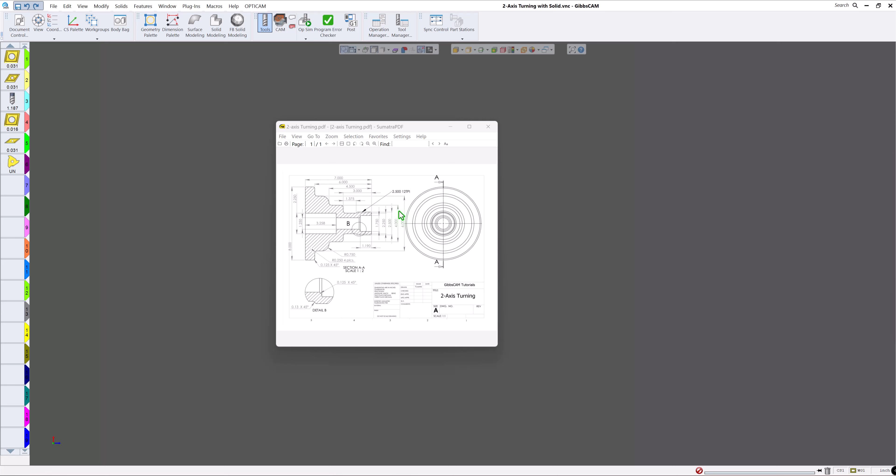If I bring up the model again, as you can see here, this is the same model. We'll put the print in the description as well as the tool list, but it's the same part we did in class number 4, just using a solid model instead.

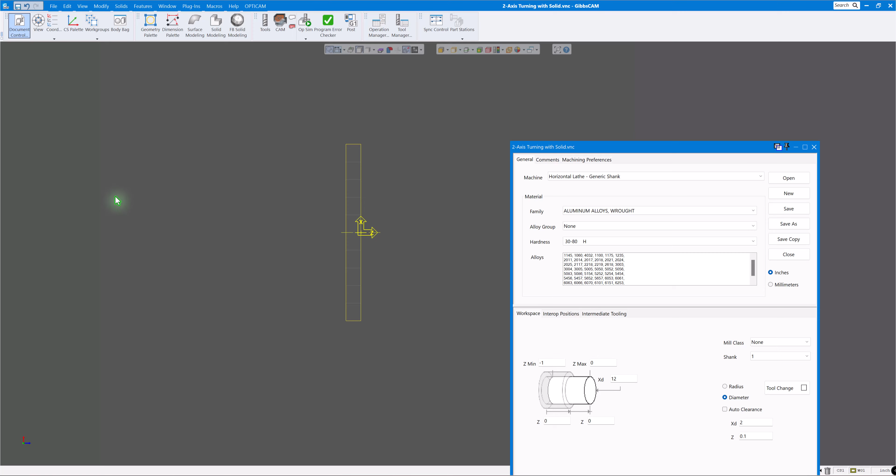Now, just like with all Gibbs parts, when you start a new part, especially if you're importing a solid model, you always want to start Gibbs by creating a new part to make sure you have the correct machine and everything before you import a solid model. So make sure you start new, give it a name, go to your document control, make sure you're on the correct machine that you want to program.

In this case, the horizontal lathe generic shank here. Don't worry about these dimensions here. Just make sure you're on the correct machine first and then import the solid model. Now, when you import the solid model, you can just go to File and Import, and you can find the files that you would like to import.

In this case, it's a SOLIDWORKS file, but you can see the drop-down menu. You can bring in pretty much any type of file you would like. Some of these aren't solid models like DXF, but a lot of the rest of these are. So STEP works really well. Parasolid is probably one of the best to bring in. Also, SOLIDWORKS files or assemblies will come in just fine. So in this case, the part we're going to do is this one right here, same one we did before. So I'm going to click on Open.

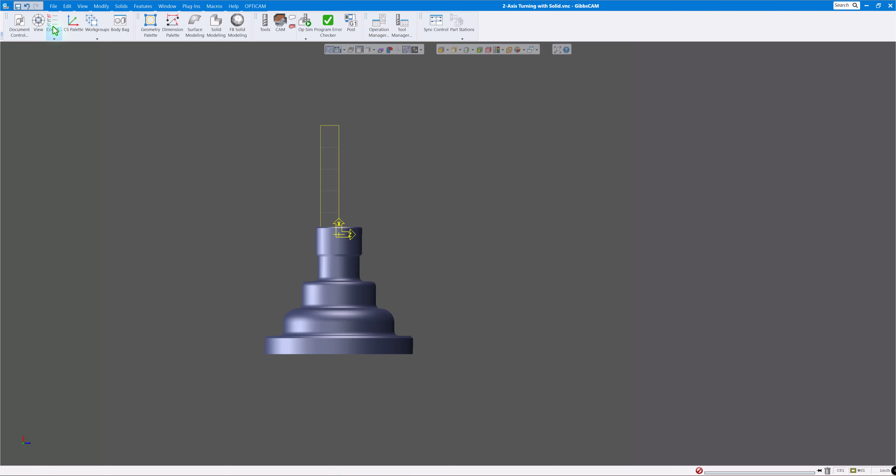And Gibbs is always going to bring in the part in the orientation that the engineer, whoever drew this, put it. So it won't necessarily be in the correct position that you want to start machining it. In this case, you can see it's 90 degrees off. This is my ZX plane. So we need to take this solid model and rotate it.

So the best way to do that is just to click on the part, your solid model, make sure face selection is off. Even if face selection was on, it would still grab the whole part because it's a solid. So we'll just grab the whole part, go to Modify 2D Rotate, and it wants to know where's the center position that we want to rotate.

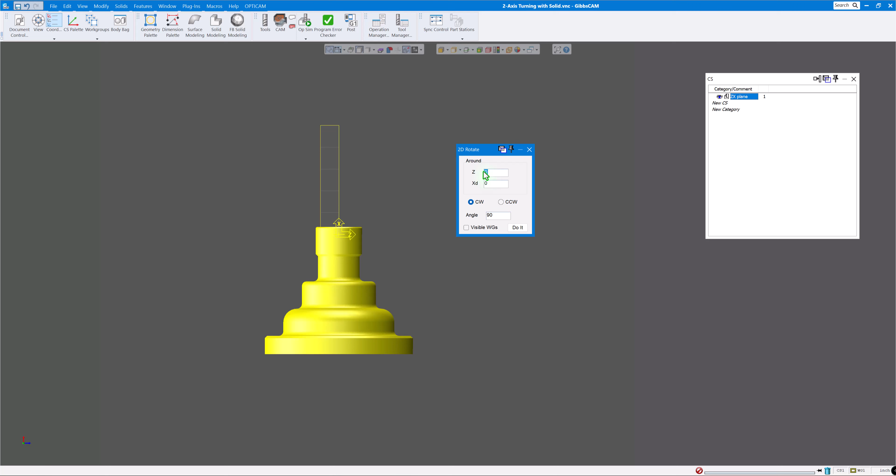Most engineers, when they draw turning parts, will have the origin or the center right through the lathe part. So normally you don't have to change these numbers here. So it can be 0, 0. And we just want to go 90 degrees clockwise. So click on Do It.

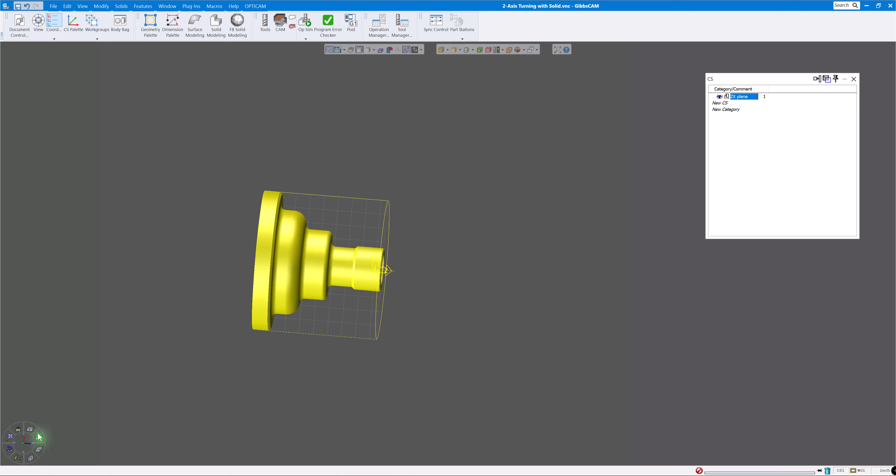So the next thing you want to do, once we have that there, is just go to Modify. And since this is the only part on the screen, you could do Shrink Wrap or Shrink Wrap Visible, either way. So we'll just do Shrink Wrap. And you can see by doing that, it wraps material around the part. Now you can probably see if I go to my top view that the origin is not in the front of the part. So that's easy to change as well.

So let's just go back to Document Control. And if you look at this number right here, this is telling me the solid model is 0.4157 from Z0. So all I'm going to do is go to Modify, Move Part Origin. I'm going to just type in that value, 0.4157, into the Z, click on Do It.

And you can see now the Z is in the front of the part, and all these numbers have changed here to reflect what the actual dimensions are of this solid model. As you can see, you got 0, -7, all this information here. So now we need to start filling in the blanks here.

We want to face off some material on here, so you'll decide what stock you have from the saw cut that you got from your supplier. So I'm just going to give it 1/8 of an inch there, and you can see 1/8 of an inch there above that Z0, the line there. You can see that. It's -7. I'd probably put -7 1/8, so some to face off the back side when you flip it around.

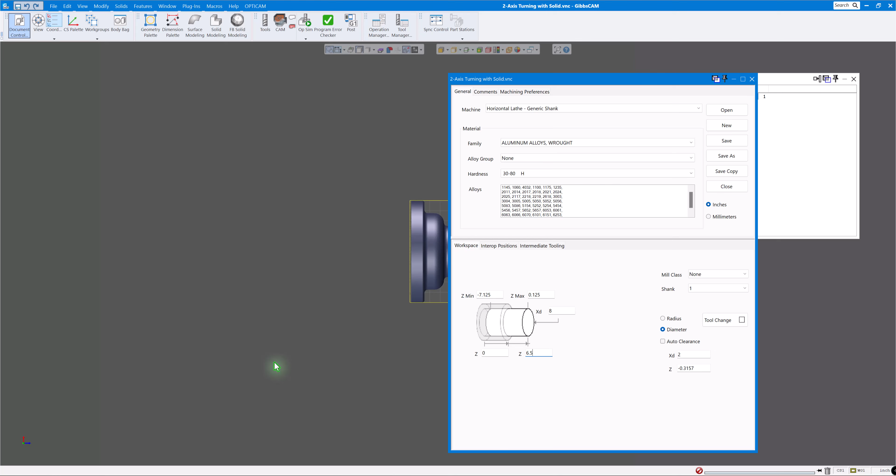Since we did a shrink wrap, it already says this is 8 inches diameter there, and we're going to just leave that stock how it is. Since we're 7 1/8 inch clear to the back there, I think last time we did the other part, number 4, we said there were 6.5 inches of material off facing forward to the main spindle. Actually, I'm going to change that to 6 5/8 to reflect the 1/8 of an inch that we have there.

And so in the back side, we have 0.625, not a minus. That just needs to be that. And you can adjust these how you want. On the 2-axis turning part, these numbers don't matter really too much unless you're using machine sim, which we're not on this part. So everything there looks pretty good.

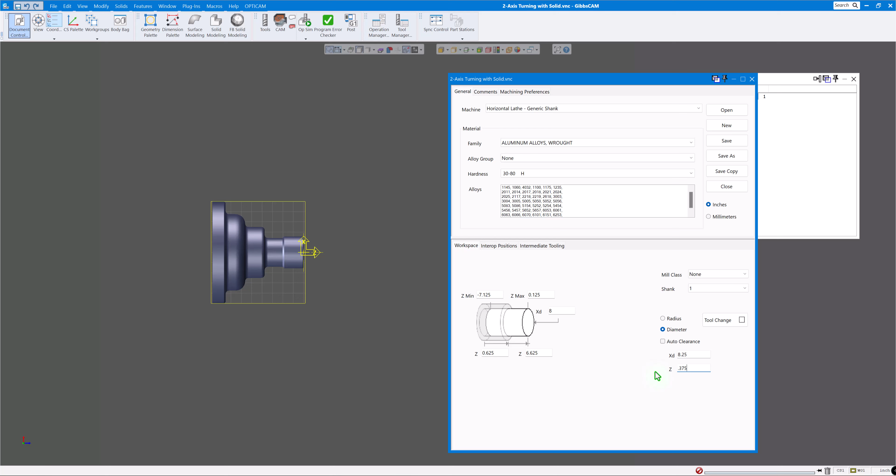The shank we're using is 1-inch shank. You can see the different ones there, just like the last part. We're programming in diameter and inches. And these clearances, of course, need to be just like class number 4. We're going to make this 8 1/4, and over here we'll make this .375 on the Z clearance. So everything's good to go there.

So now that you have your stock size in there and everything else ready to go, we need to now extract the geometry. There's a number of ways to do that, but the easiest way nowadays with solid models is just click this drop down arrow and click the second one down that says slice spun body. If you click that, you can see it slices the body as if it was being turned. Even if you had a hex on the end or keyways, it would still grab the profile of the outer diameter and inner diameter as if that was spinning.

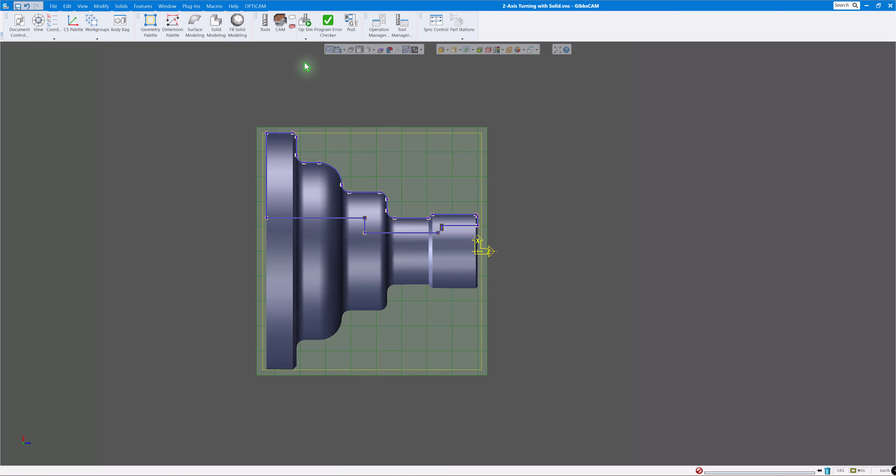So you can program it right from here, pull your markers in and machine it, but I prefer to extract the geometry in case I want to measure something or get dimensions off there. So you can go anywhere on the green where it sliced it, right click, click extract profile, geometry extraction, make sure it's highlighted, do it, and then you can turn that back off. So there's our geometry for our part, the exact same geometry we did before on class 4. And now we're ready to start machining this.

So if we turn on our tools and our cam, you can see here's the tools that we used on class number 4. You can download that tool list as well under the description to get the same tools that we used before. Now I saved the processes so we don't have to fill in all the blanks again, because these will be the same parameters and everything that we used on class number 4. So I'm just going to bring these in.

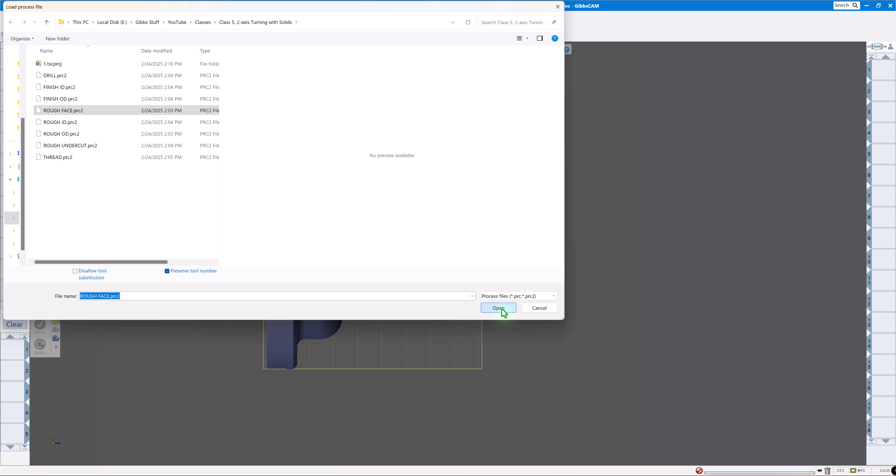So all we need to do is right click and go to load process, click browse, and there's my processes right there. So first thing I'm going to do is rough the face. Click there, click open. Now if you didn't have the tool list, it would automatically bring in the tool for you, but we already have the tool there, so that's fine. If I open it up, you'll see all the different parameters we set on here. You probably need to update a few things to match our part.

So I think we set our Z clearance at 3/8. Yep, 3/8 on the Z. So I'm going to say 0.375. And again, we retract to 0.375. And the material we have on the front is 1/8 of an inch. So 50 thou depth of cut, our speeds and feeds are all exactly the same. So we'll just click on the face of that.

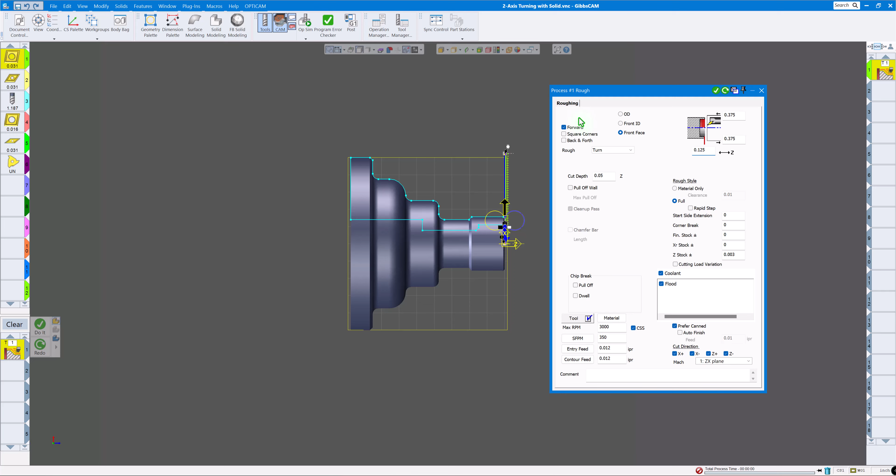And again, grab it to the OD, zoom that up a little bit. We want to face from the outside down, put the black round pointer right at Z0, and we'll click on do it. So now we have the first operation, face it off. So I'm going to clear this out now and do our next operation, which will be load process, and we're going to rough the OD.

And again, it's going to bring in the process for us. And we're using the same tool, tool number 1. This time we're just doing an OD there. So let's open this up, make sure our parameters are what they need to be set. Everything looks good there, same as before.

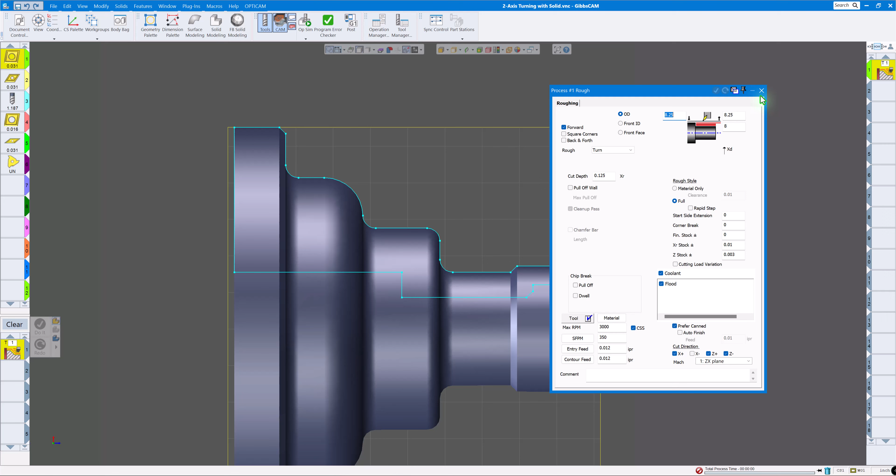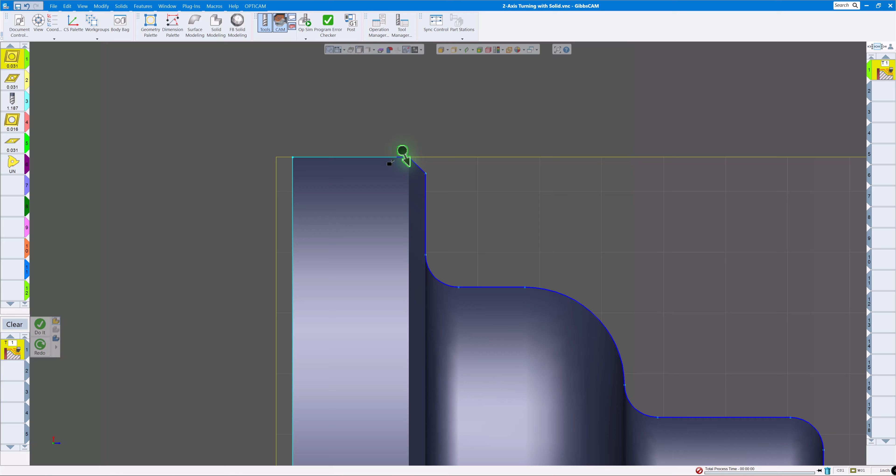So let's just start. We'll start here on the chamfer a little bit and we'll drag it off. Again, you can just right click and move it if you want. If I want to move it 0.1, you could do that. That'll move it off there 0.1. And the best way to get your marker to the back there is Control Shift. We'll go right to pretty much that end of that chamfer there. And we'll click on Do It. Now we have our roughing done.

Okay, the next operation we want to do is drilling. So we'll clear this out. Again, I'll say load process. We're going to do drill. And we'll open this up just to make sure and check our dimensions there. So we need to change a couple things here. I want to change this to 0.375, 0.375. And we faced it off almost all the way, but I'm just going to put 0 in there anyway. We want to make sure it gets clear through our part.

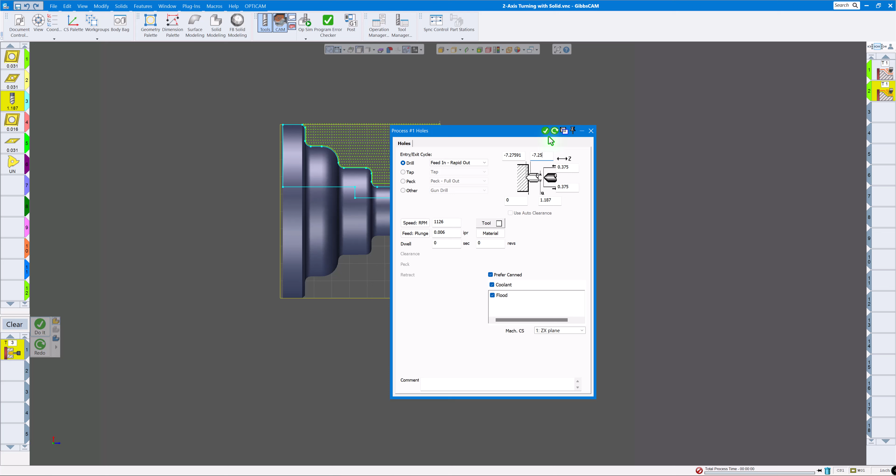I'm going to highlight this, which is to the edge of the drill. Hold the Alt key down, click on here. I can see that's -7, but remember, you have 1/8 of an inch to go here, so I'm just going to say -7 1/4. Feeds and speeds are the same here, so let's click on Do It. Now we have the drilling done.

So our next operation, let's clear this out. Right click, load process. This time we're going to rough the ID. And of course it brings in our tool number 4. Check our dimensions here, parameters, 1.187, because that's the size of our drill, so that's just fine. Everything there looks good. So let's just start on the front there. We'll start off the part, just right click and say move the start by 0.1.

Okay. And we're going that direction. You need to choose direction before you click the clearance there, what you want to be. So we'll just change that again. Move by 0.1. Now you can see it moves it out 100 thou in front of the part. Control Shift. Want to end there, a little bit past there, and we'll click on Do It. So that roughed out the bore there.

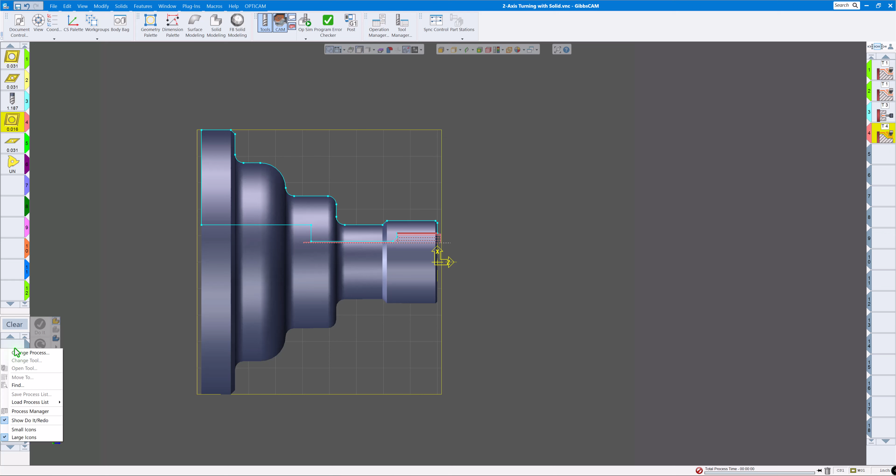So I'm going to clear this out. Again, right click, browse. We're going to now finish the ID. Pretty much the exact same tool. And we'll just stop short of where it left before. Do it. So now that's finished.

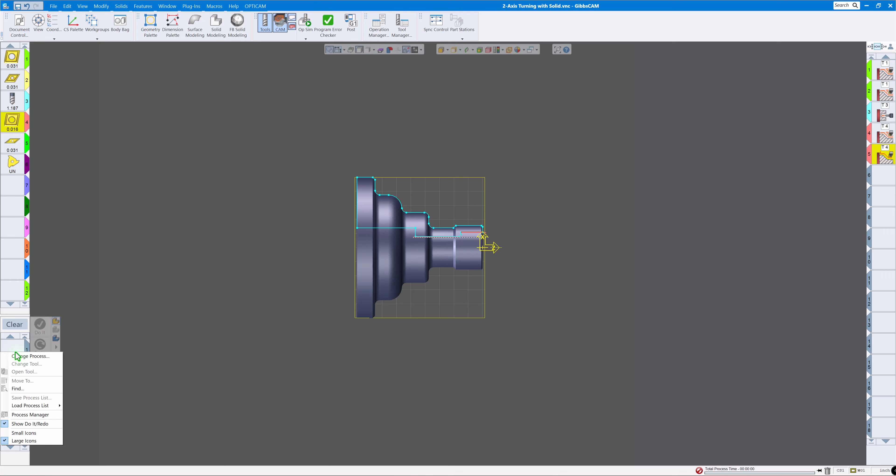So let's clear this out. Right click, browse. This time we're going to rough the undercut. And that's with tool number 5, 35-degree tool. Check our dimensions here, parameters. All that looks pretty good there. Okay, all looks good. Zoom that up.

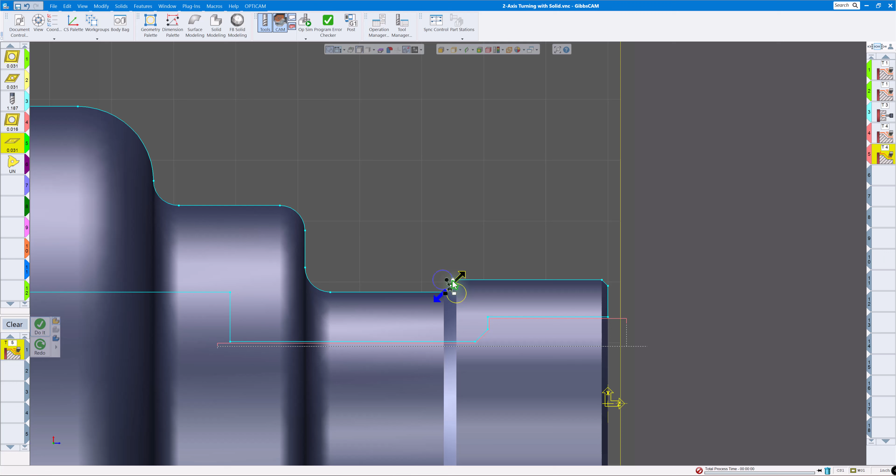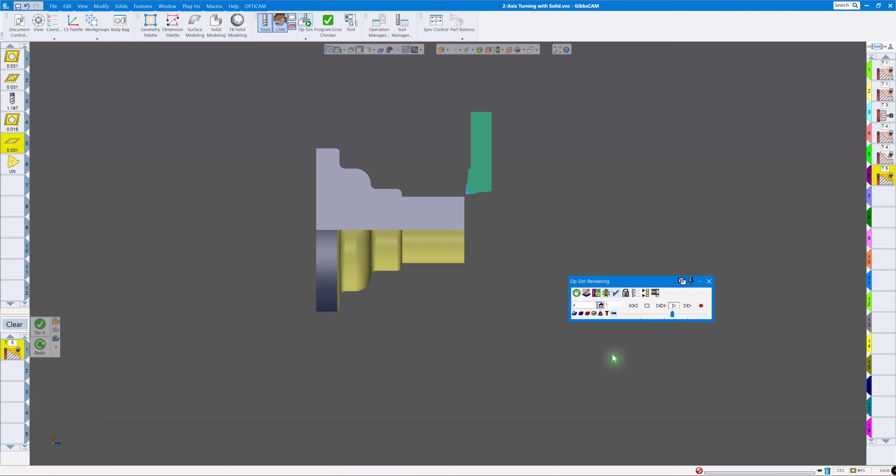Going to start on the chamfer, off the part a little bit, and on this vertical line there, just close enough. We're just doing material only, so it's only going to cut where material is left. Click on Do It. So now we have that roughed out. So we could look at what we've done so far. I'll slow it down. There's our OD roughing, drill, roughing, finish, and rough the outside there. Okay.

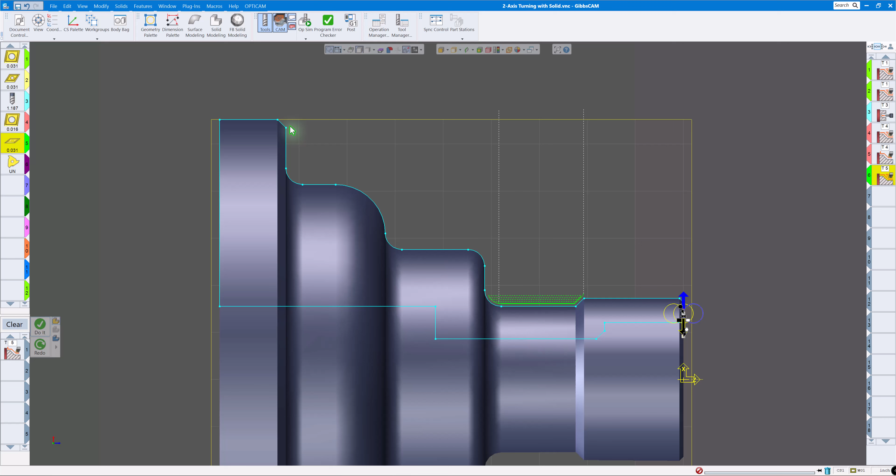Okay, next we need to finish the OD, so let's clear this out. Load process. We'll do finish OD. Again, tool number 5. Let's start there. We've already drilled the hole and finished the ID, so I can just start right about there. We're going to cut from the bottom up. So actually we'll finish on this little chamfer right there, and off the part just a little bit there. And click on Do It. Now we have a finish pass there.

And the last thing we need to do is thread. So let's right click, browse. This time we're going to do thread.

Let's open this up and make sure we have everything correct. 12 threads per inch. Probably want to fix this a little bit. We need to be out the front a little bit, so I'm just going to say 1/2 inch there.

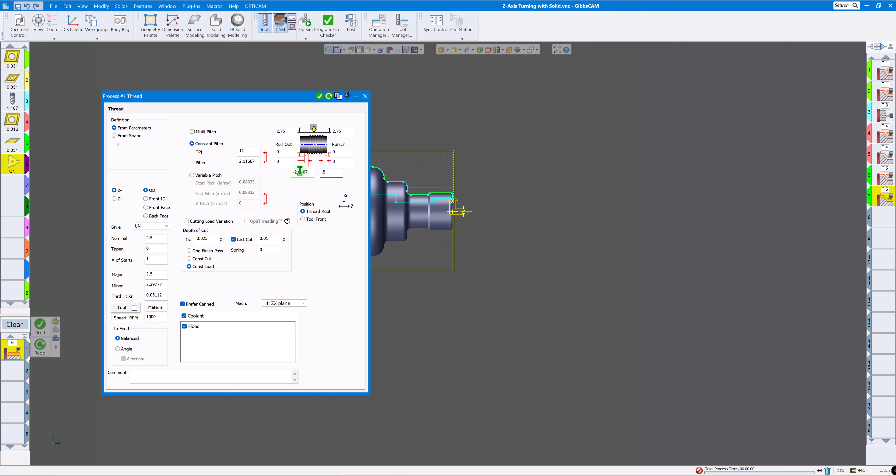Let's zoom this up so we can see where we want to end. I'm going to highlight that, hold the Alt key down, and click on that little chamfer at the end of the chamfer there, 1 5/8. And we're doing 2 1/2, so 2 3/4.

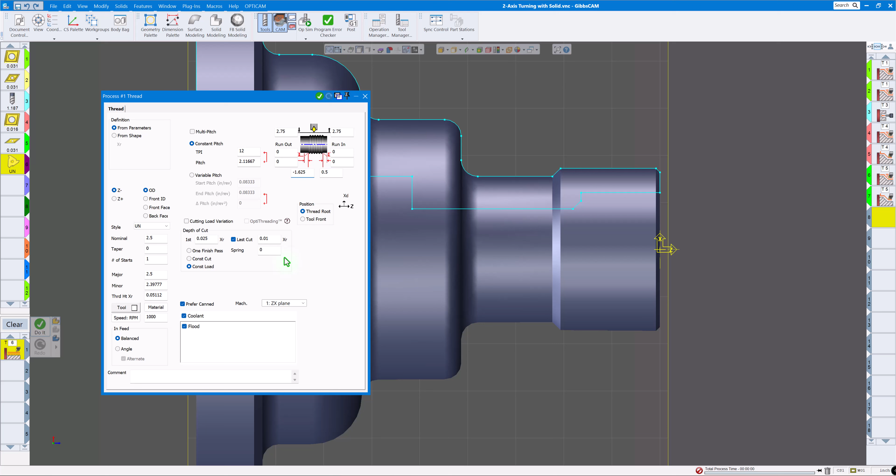Everything there is good. We really don't need to do run in, run out. Everything there is still the same from when we did part number 4. So we'll just click on Do It.

Okay, now let's render the whole thing here. We'll rewind. Now I have this color option set to op number. We probably want to do it by tool number, that way each tool will have its own color, so you can see if you made a mistake, but you can see what each tool is doing. Okay, let's play.

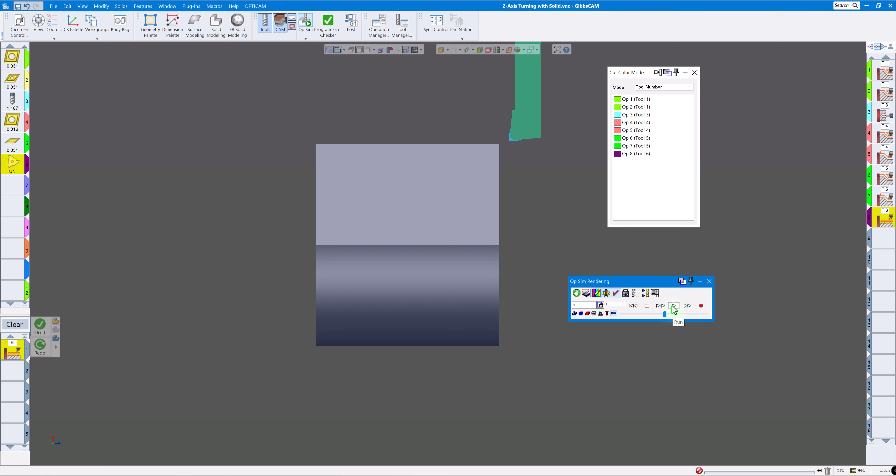Rough. Okay, drill. Rough the ID. Finish the ID. Undercut, rough the undercut. Finish the OD.

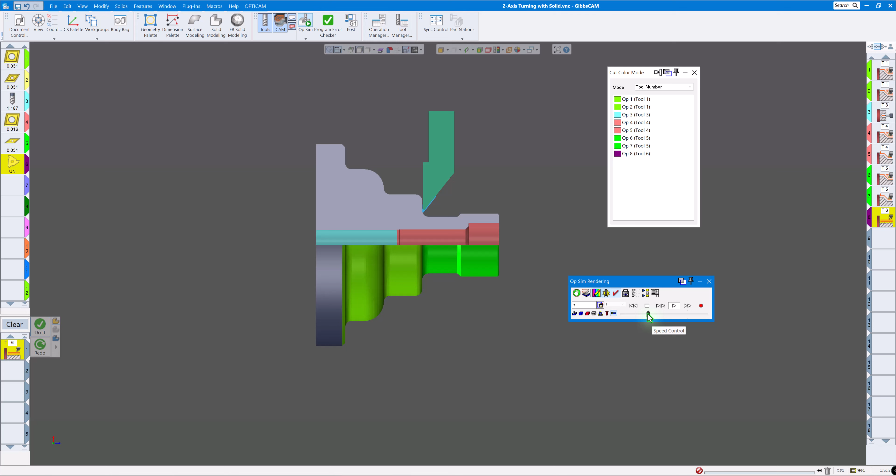And then thread is the last thing we're going to do. Let's speed that up, and we'll turn that off there so we can see the full threads. Let's unzoom there so we get back here.

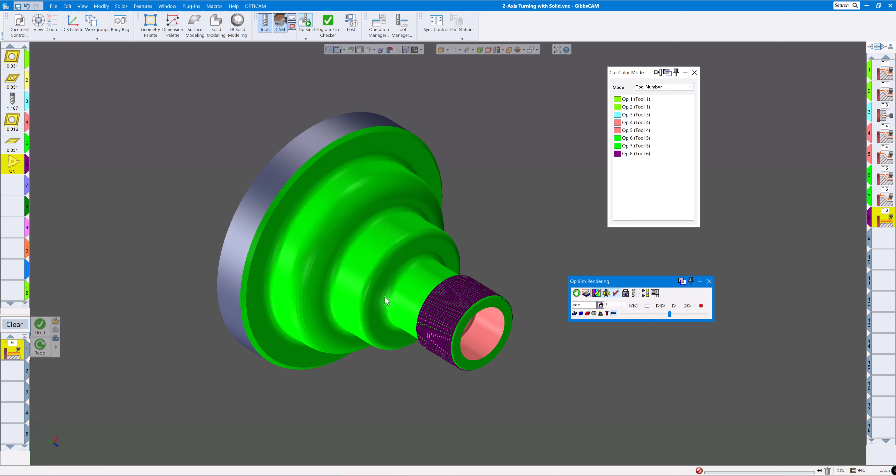Okay, so now our part is finished except for the back side there. And of course, all you need to do is flip this around. You can save this, do a save as backside. Then you can take the solid model, flip it around, and then program the backside for your op number, your second op to finish the part out.

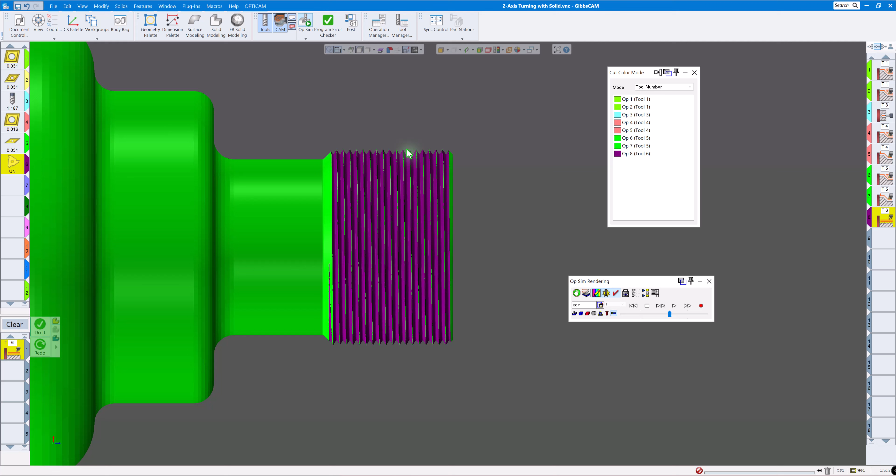Now that's finished this part here, but a couple other items here. As you can see, the threads are helical, which of course they will be. But if you have a graphics card that's not as fast when you're threading, some graphics cards will not show you the threads threading real fast, it might be real slow in rendering.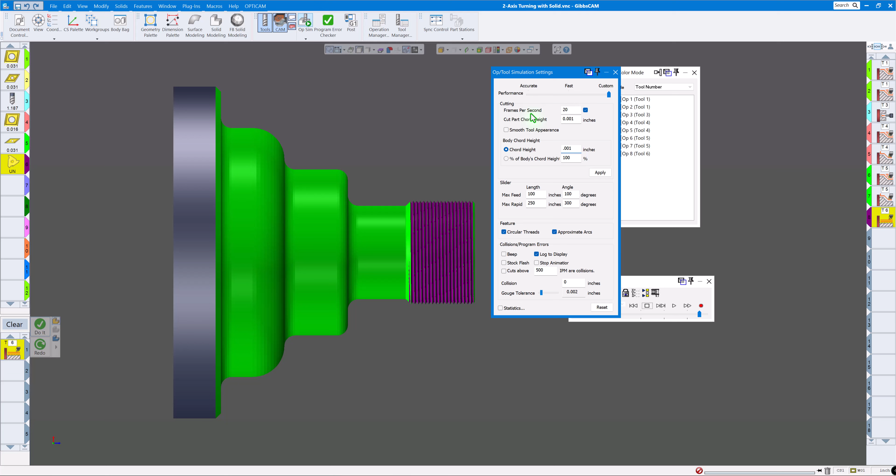Mine's pretty fast, but if you want to even make it go faster, you can right click in this blue area, go down to the settings. If you click on custom here, you can change this to whatever you want. 10,000 is a little much for me, so I'm going to change that to 1,000. But what you want to click on is circular threads there. So we'll just click apply to make sure everything's good.

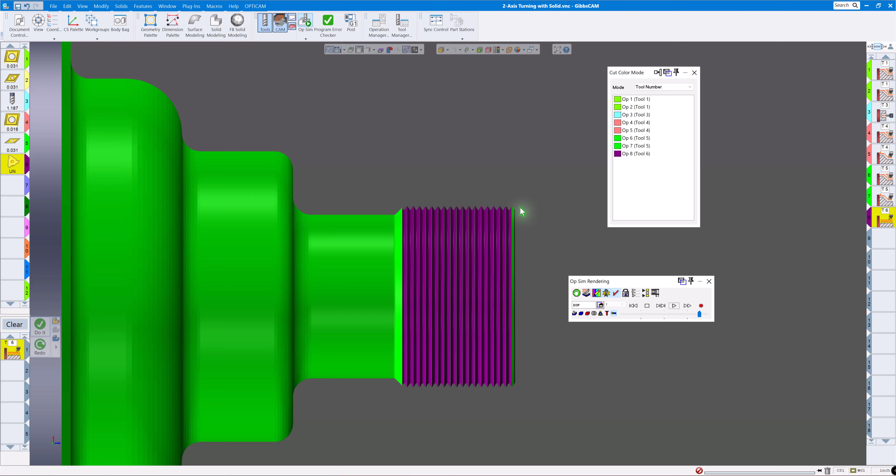And let's render this again. You can see how much faster the threads went on here, pretty fast, and I don't even have it up all the way. You'll notice the threads are not helical, but of course your output code will still have your threading code to cut your threads how they should be. To render, you really don't need it to be helical if you don't want. This will speed up all your threading processes when you do your op sim, and it'll speed it up quite a bit.

So just like that, there's your part. And maybe one last item, if you want to save your operations over here, maybe you have a family of parts, or maybe you have another part coming in that's going to be basically using the same tools and everything, you can save those processes just like I did here.

And to do that, you just double click an operation, you can close that, and of course it loads it over here on the process side. You can just right click and say save process list, so you can save it and give it a name, any name you want, and save it in whatever folder you would like. That way you can always save your processes and come back to those and reuse them on the next part.